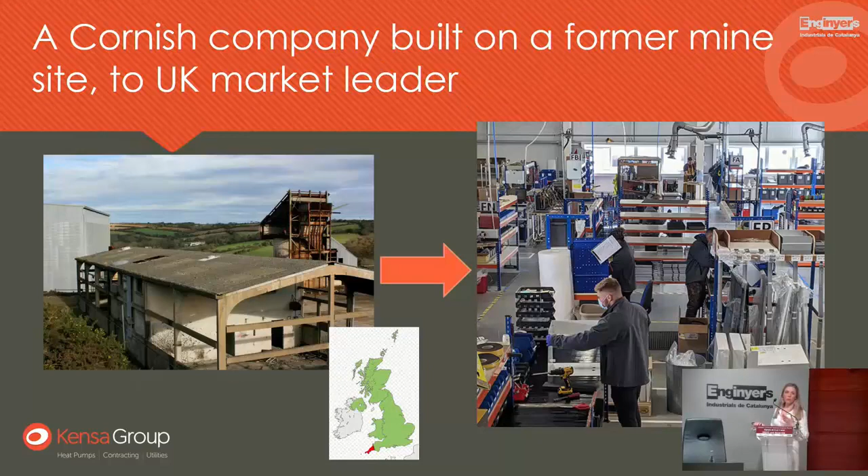I work for a Cornish company, right down in the southwest of the UK, which meant I had a really long journey to get here because I live about 3 miles from this factory. Our factory in Cornwall, where we build ground source heat pumps, is on top of an old mine. There are a lot of mines in Cornwall, and that means we're actually able to heat this new building on the site with water from the mines beneath it, which is a really cheap way of installing the infrastructure you need for ground source heat pumps.

The Kensa Group has 4 different companies. We've got our parent company, and Kensa Heat Pumps is our manufacturing company. Now, we found, as many other people do, that if you put a heat pump into a house, you get a phone call saying my heat pump doesn't work. But quite often the issue is that the system hasn't been designed properly, it hasn't been installed properly, it hasn't been commissioned properly. So Kensa Contracting was started so that we could do the design, the installation, and the commissioning, and that our customer had a single point of contact so that if anything goes wrong, they just speak to one person to get it fixed.

The upfront cost of ground source heating is incredibly high. We want to reduce the barriers to uptake for this technology, and so Kensa Utilities was formed, and that's the part of the company I work for. It's been created to fund, own, and maintain the ground array infrastructure that serves our heat pumps, and in that way we grow the market so we can sell more heat pumps.

Kensa started over 20 years ago. Initially, our market was the self-build market, probably very similar to the kind of installations you have here regularly in Catalonia, where it's individual properties — people with quite a bit of money who care about the environment and want the best heating available, so they install their own system. That's a very small market, and it doesn't help us solve the issues we have of high carbon consumption.

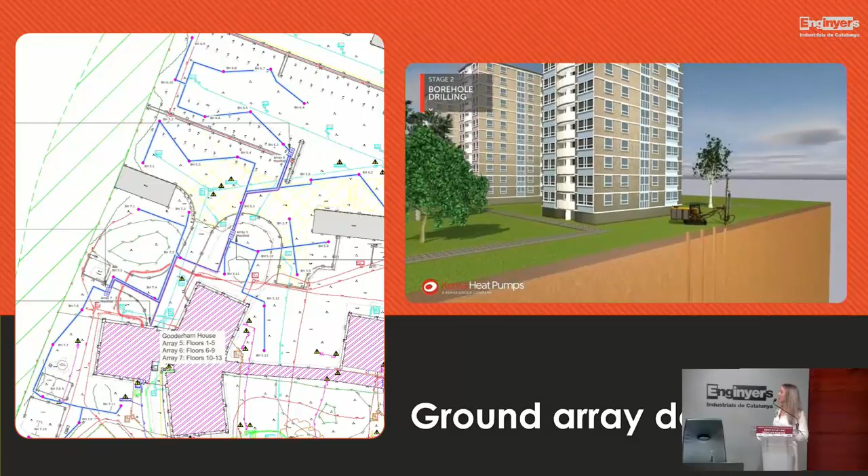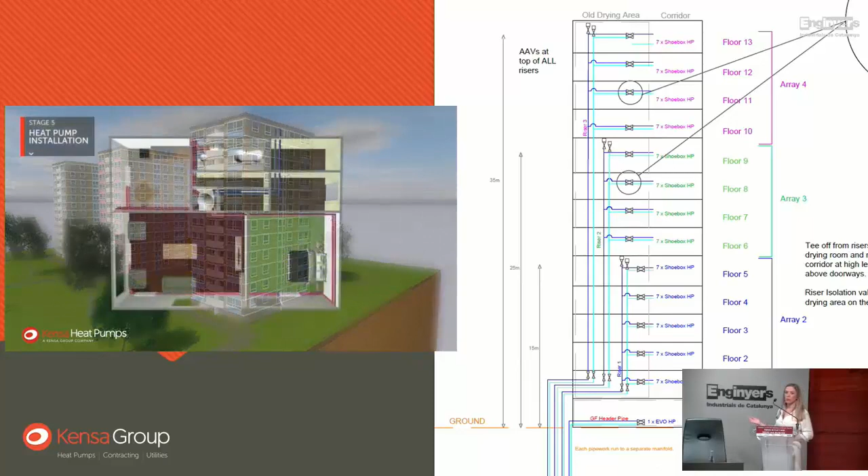Now, inside the building, you can see the feeder pipes are separated into 3 different arrays. That means we don't have to have a central pumping system on these pipes, which reduces the maintenance cost and ownership cost to the person managing this system. You don't have to have an electricity supply to pump fluids around those arrays, and it makes the business model far more simple.

So the blocks of flats are separated into arrays, and you can see here there are 7 shoebox heat pumps, our smallest heat pump, on each floor. That means there are 7 flats on each floor of these 3 blocks, and each array is serving between 4 and 5 floors of the building.

Most blocks of flats like this already have service risers, so we don't have to run pipes up the outside of the building. We use the existing service risers and install insulated pipes up the centre of the building. Now, you've heard a lot about not insulating the pipes, and that's great when they're in the ground where they can gather heat. But once you come up out of the ground, if you don't insulate them, you end up with condensation on the pipes within the building, and you don't want that.

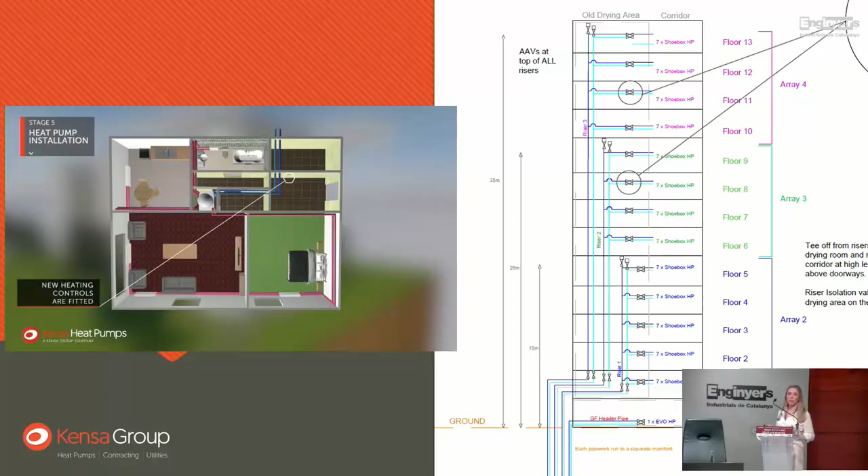So the pipes up the service risers are all insulated. You can also see on the design there are 5-way valves on each of these for every single flat, because when we fill these pipes with water, we have to pressurize the whole system and pressure test it to make sure there aren't any leaks before we switch it on. It also means we can isolate each individual section of that network, so if something goes wrong on one floor, it doesn't have to affect all of them. That's very important at this scale of project, because what you don't want is for the whole system to go down and have 300 people without heat instead of 2.

So inside the house, these are images from this block of flats here. That's our very small shoebox heat pump. It's a lot bigger than an actual shoebox, but it does genuinely fit under a kitchen sink, and that's really important when you're looking at high-density housing where space is a premium.

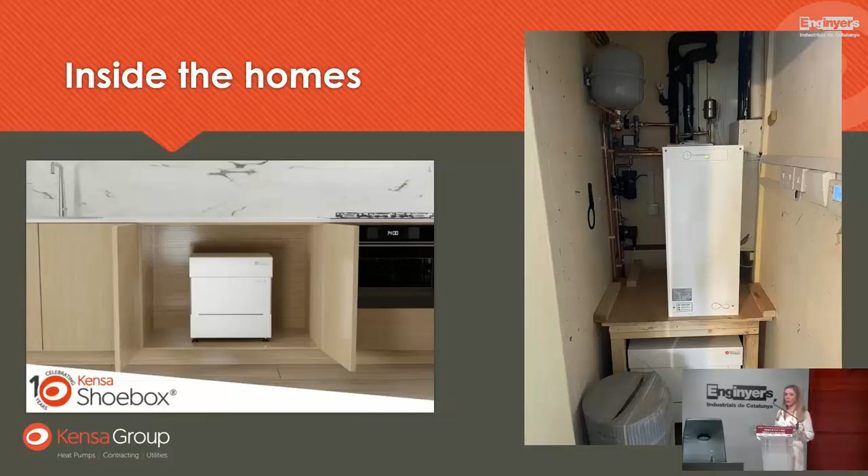On the right, the image is the shoebox heat pump underneath a phase change heat battery. This heat battery is in place of a hot water cylinder, but it's about 1/3 of the size. So instead of using water for energy storage for your bath and shower, it uses salt, which means it can hold a lot more heat in a much smaller space. Again, it's really vital for smaller properties where space is expensive.

So this is the project in numbers: 273 flats across 3 blocks. That's a huge number of people that had their living conditions improved. These flats previously had electric storage heaters, so the people living in these houses have had their energy bills cut by more than half. These are all lower income households, meaning we're taking them out of fuel poverty. They can actually afford to turn their heating on now, where many of them didn't before.

Also, with storage heaters, you have to remember to charge it at night to release heat in the day. It's not heat on demand. They can run out of heat, so we had people that were cold in the evening. Now we know every single person in these blocks of flats is going to be able to have heat when they want it. There are 109 boreholes serving these flats, a very large amount, nearly 29 kilometres of drilling. The whole project is being done in 9 months.

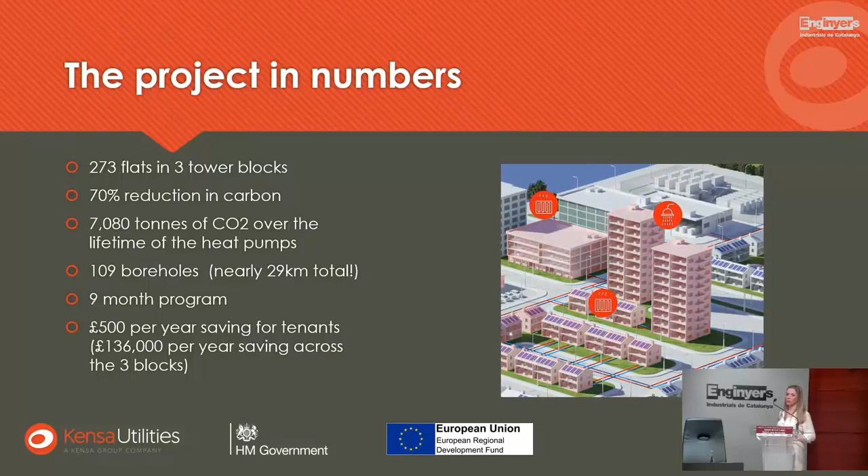Which is a fantastic feat of engineering. I think that's probably one of the most impressive parts of this project. And it'll save the residents £500 a year. That is different to the way you'd see it here, our energy costs are higher than in Catalonia, but it's still a reduction of over 50% to each household, which is £136,000 across the 3 tower blocks.

This is just to bring it back to the fact that these are real people that have had their lives improved. We've talked a lot about the engineering and why we might want to save the planet, but these are the actual people who are now able to heat their house when they couldn't before. They report that it's easy to use, it keeps their house warm, and it's much cheaper than the old system we had.

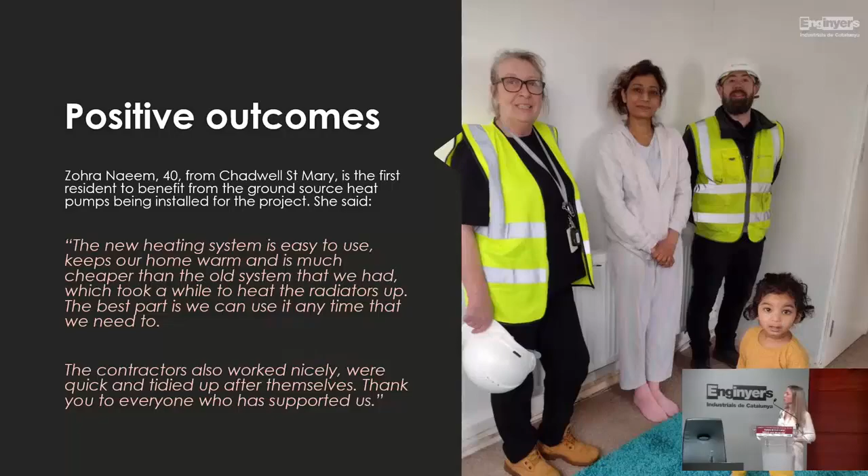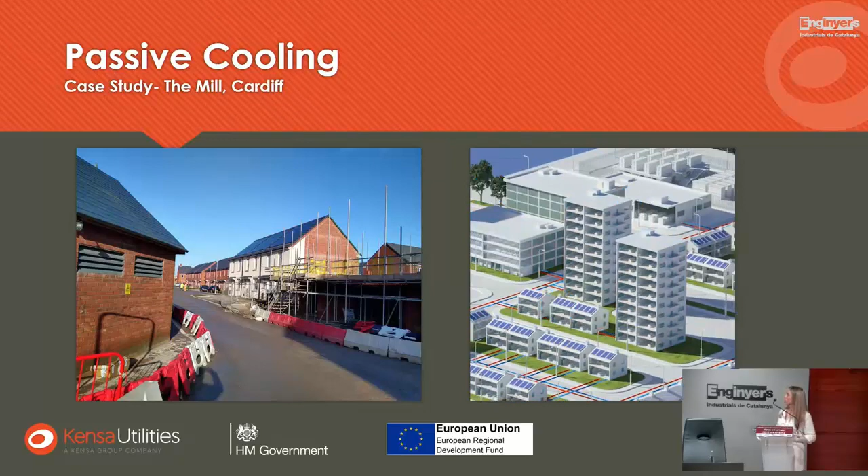We monitored this house between July and October last year, through 2 heat waves, which won't sound very hot to you, but for us in England it was incredibly hot - 32 degrees outside. Most homes in England don't have any cooling, so that is really quite warm. The room we installed the cooling in was maintained at 21 degrees Celsius, and that's without turning the heat pump on - just using the ground and dumping the heat in the borehole.

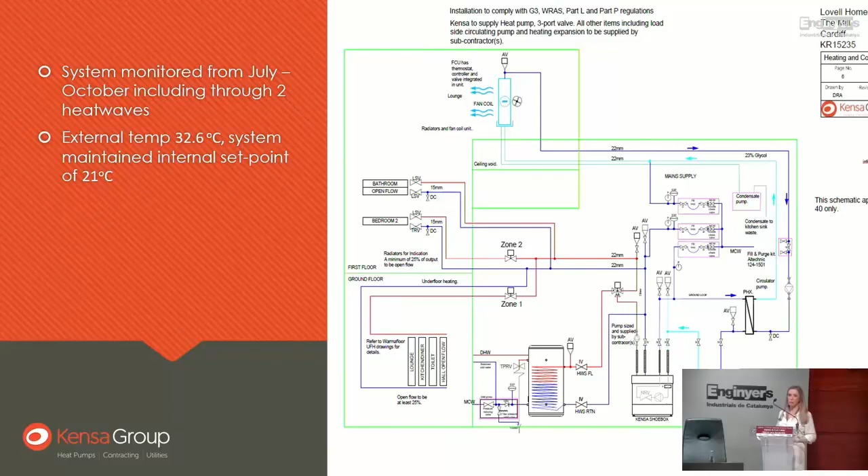This is the unit that you require - just a plate heat exchanger on the bottom, a circulation pump for the ground side, and a circulation pump for the domestic side. It's ridiculously simple. So the running costs for a single room were £1.14 a day.

To put that into perspective, if you were to cool the same room with air conditioning, it would be £4.25 - about a quarter of the price. And the reason for that is that all you're doing is running 3 motors - the 2 circulation pumps and the fan coil unit. That's the only energy it requires.

If you were to cool the whole house over this period, it would have been £378 with this model, and £1,409 if you used air conditioning.

The benefit of this as well is that you dump the heat into the ground, and so when you run heating in your home or create domestic hot water, you're getting that much cheaper, because your heat pump can run more efficiently - it's doing less work to upgrade that heat when it comes in, because you've warmed the ground.

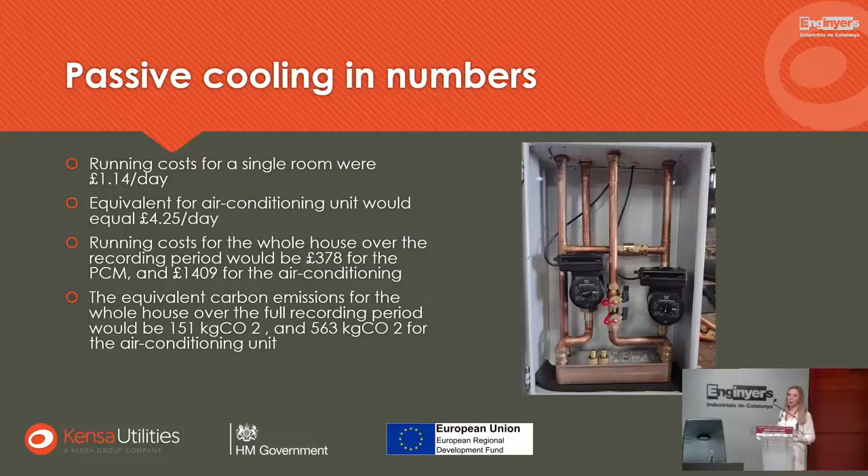The other benefit is it's about a quarter of the carbon as well. So your impact on the environment is far lower if you're using passive cooling compared to air conditioning.

A little bit more about the business models. You can see from the passive cooling how that would be appealing to homeowners. It really helps us to sell this technology, that it's lower cost, so it's more desirable. And this is really what we're trying to do - to expand into that market.

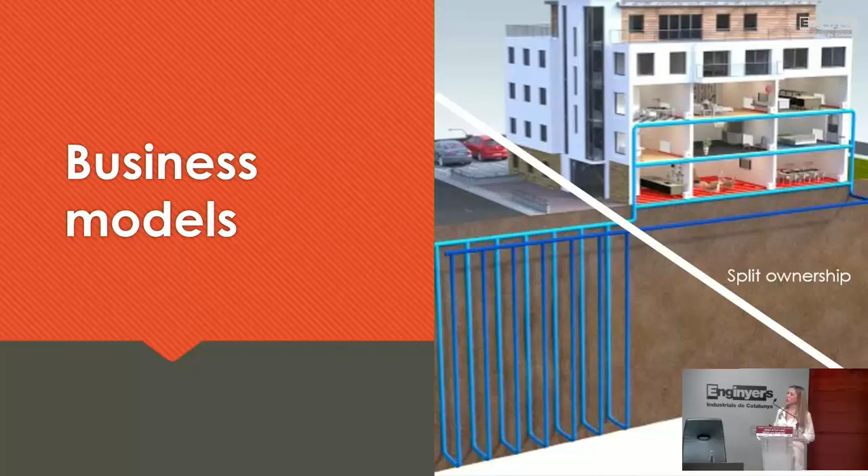The next biggest thing we can do is stop selling our customers this infrastructure in the ground. Up until now, Kensa Contracting has been selling the whole system to landlords and developers and just handing it all over. If we remove that bit, if we absorb the upfront cost and then charge households for connection, it makes it easier for these projects to go ahead.

Our vision, and we haven't called it Thermonet, we call it networked heat pumps, which I'm not convinced is the best name for it, because people tend to want to be their own little castle. They don't want to be connected to other people and at risk of failing along with them. They want to be independent. So calling it networked heat pumps makes them feel part of something they probably don't want to be a part of.

So we do particularly want an individual heat pump in each home, and that's why we have such small heat pumps available on the market. It's mimicking the gas network. That's very important for us in the UK, because currently 85% of homes are heated with natural gas through the gas network. So people are very familiar with that model. They don't want to change, and we don't want to make it seem difficult to them. So if we replace one network with another, it's quite familiar.

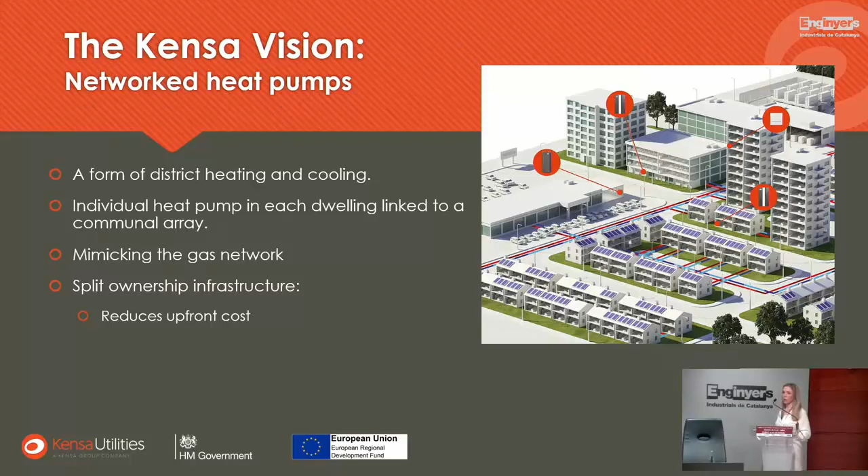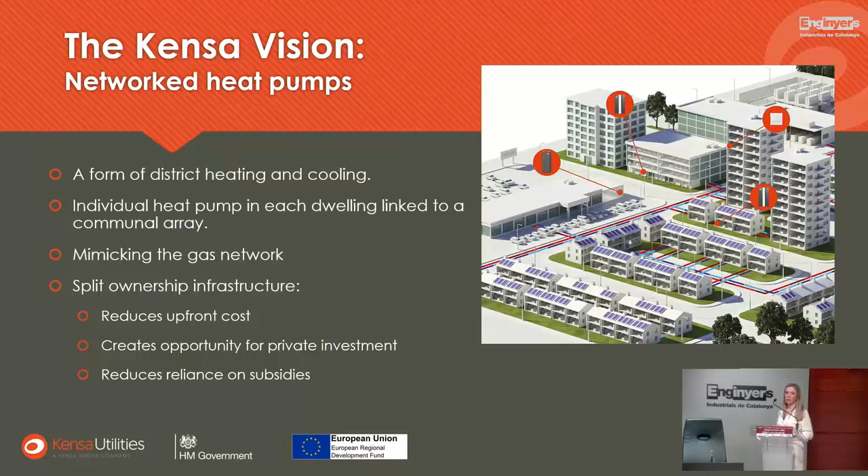Kensa Utilities is selling split ownership infrastructure. Kensa Utilities will own the infrastructure up to the point it connects with the building, and that reduces the upfront cost by 30 to 40%, depending on what market we're working in. It creates an opportunity for private investment. So instead of relying on government subsidies, which change annually, we can actually create a longer-term business model and more stability in our business by using pension funds and other investors.

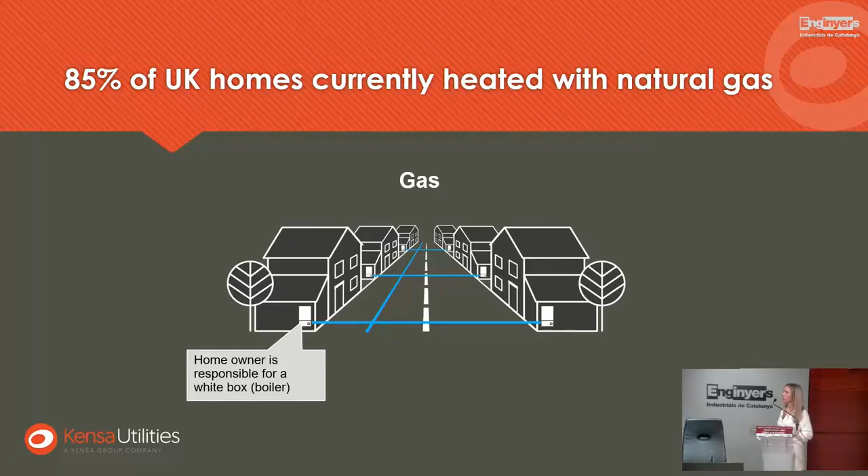85% of UK homes are used to this kind of setup. They own the boiler in their house, they connect it to the gas network, they don't care how it works, they just have a lot of heat. They don't care if it's particularly efficient, because it's always been really cheap. We want to do the same thing, but with a low-carbon alternative. At the moment it is expensive, but we expect that to come down as the momentum increases, as the market grows, and having more drillers, more installers, this cost is going to come down.

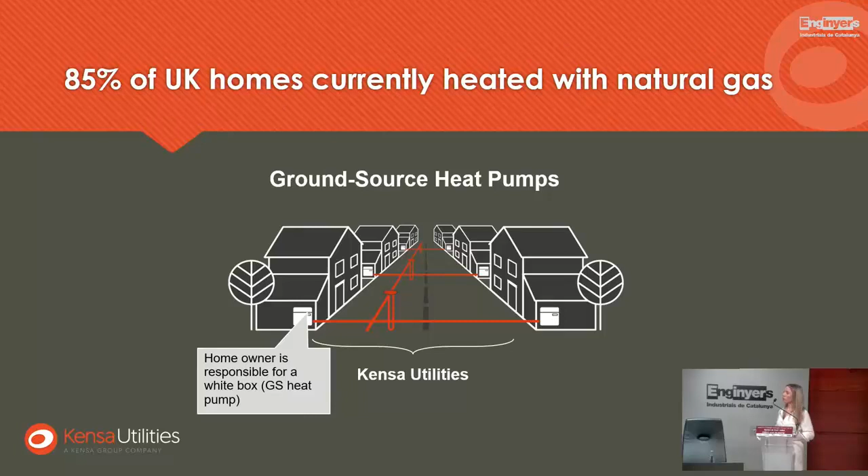The other thing we're doing is, unlike a high temperature heat network, there is no heat metering. So we don't have to have that additional piece of equipment in the house to measure how much heat they're using, and that reduces our cost for administering the whole system. It also reduces the complexity. This is a very simple business model. The cost we charge is a flat rate standing charge, so the household knows what their bills are going to be, and we don't change that. The purpose of that standing charge is just to repay the capital investment. So it's simple - everything we're doing is to try and keep this simple.

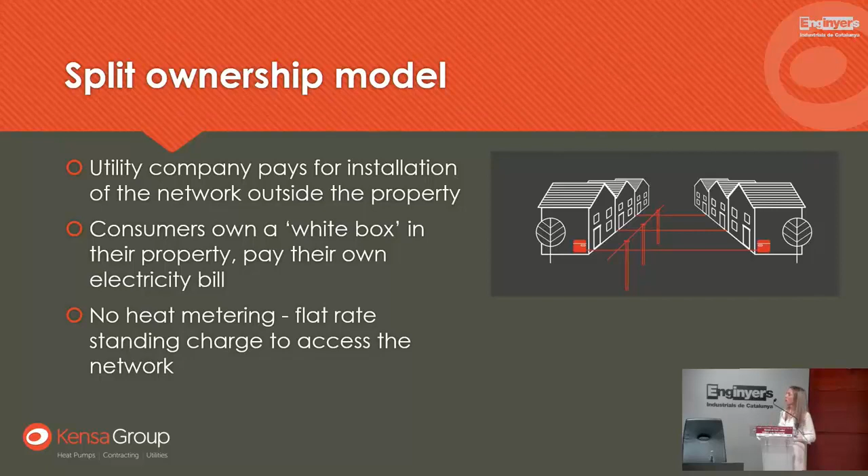Right now, we're not even particularly looking at introducing more waste heat into this system. It's complicated and difficult enough to get simple systems like this off the ground. We're just doing boreholes, we're just doing a flat rate standing charge, and we're bringing in the private investment to do that.

This now is the project that I spend most of my working week on. It's called Heat the Streets, and it's been part funded by the European Regional Development Fund. In this project, we're installing 100 heat pumps across 5 different sites in Cornwall. All of those are with split ownership. Every single customer is paying us a monthly standing charge to use our infrastructure, and we have installed a heat pump in their house that they own. They can change their electricity provider, they can manage their own heating costs. We're also installing the infrastructure for future connections.

This is what it looks like across the markets we're working with on Heat the Streets. Bear in mind these costs are heavily subsidised by the funding we've got. In new build, the developer gets ground source heating for the price of air source, because the equipment in the house is very similar - we haven't got an external unit, and they're not paying for the infrastructure. So we get cost parity with air source, which is a big deal in the UK. For social housing retrofit, that's our public housing - again, it's ground source for the price of air source, and the standing charge is really low.

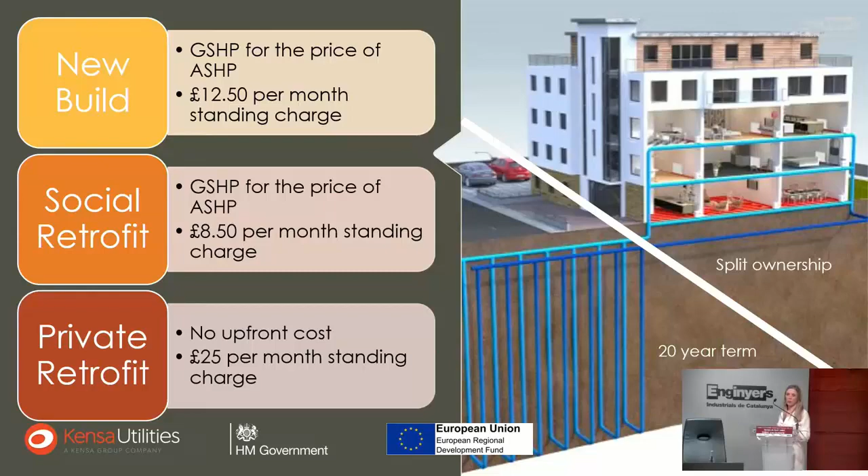And why would they do it? For new build developments, it reduces their upfront cost without increasing the cost of running the system to the household. So you get a more attractive heating system - you don't have an ugly box in the garden. We haven't messed around with the pricing, so it's not harder for them to sell the houses later.

In social housing, the social housing landlord isn't responsible for infrastructure, which makes their job much easier - they don't really want to be responsible for maintaining infrastructure serving their properties. For private housing, the upfront cost barrier is removed, and they don't have to navigate the low carbon heating market. They don't have to work out: is hydrogen coming? Is an air source heat pump better? Who do I go to? Who's going to install it? We found those are in fact the biggest barriers in the households that we looked into in this project.

On the right here are the three different models of heat pump that Kensa builds. We've got the shoebox, which does flats and small houses; the Evo, which will do really quite large buildings; and then that really big one there is for non-domestic buildings. You can cascade these heat pumps as well, the bigger ones - so if you have a higher heat or cooling demand than these can provide, you can have several of them in series.

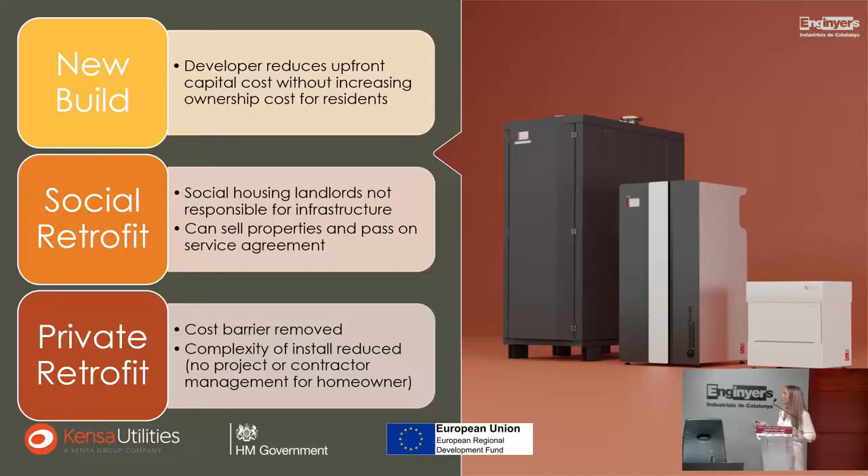This is the really fascinating bit about this project. You've seen in the presentations earlier today people talk about borehole fields - well, we've worked in an area here where there isn't space to do that. Instead of using a borehole field, we're installing the boreholes in the road. Now, there aren't many places that don't have a road, so there aren't many places that you can't decarbonise.

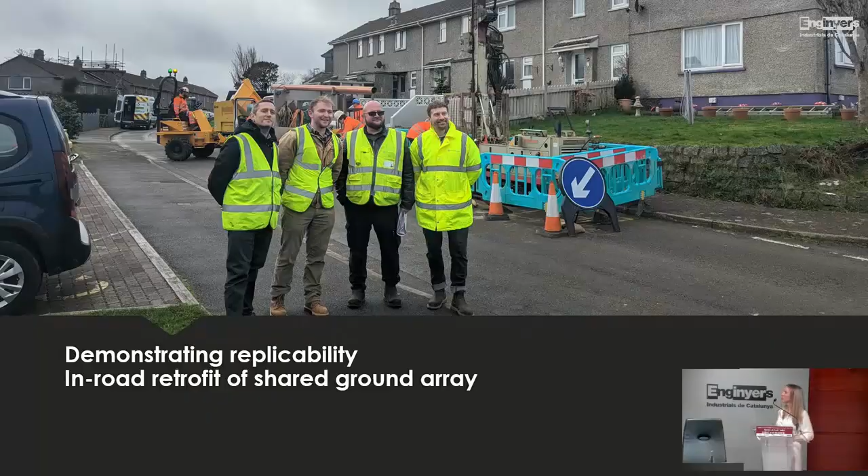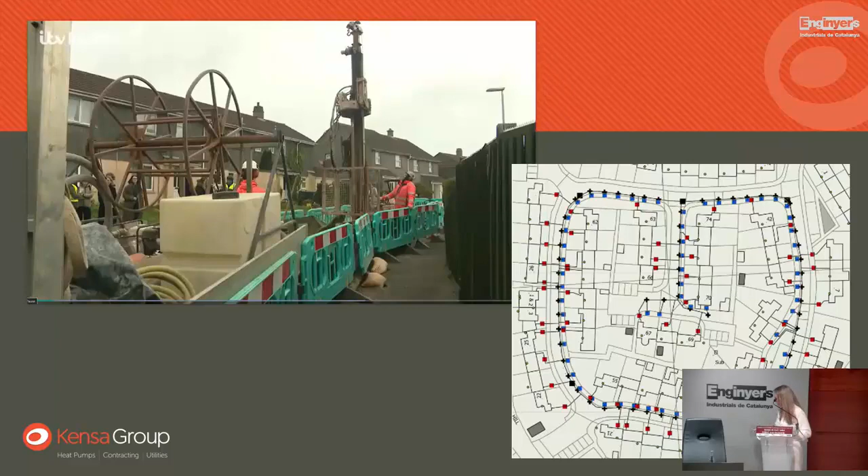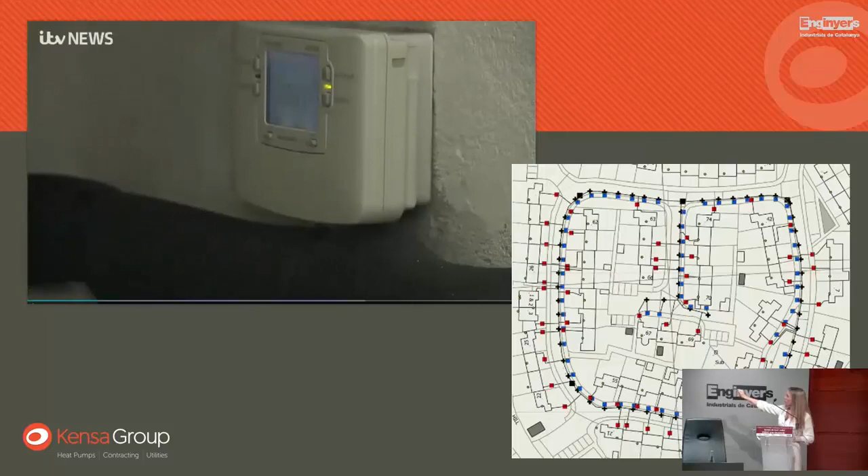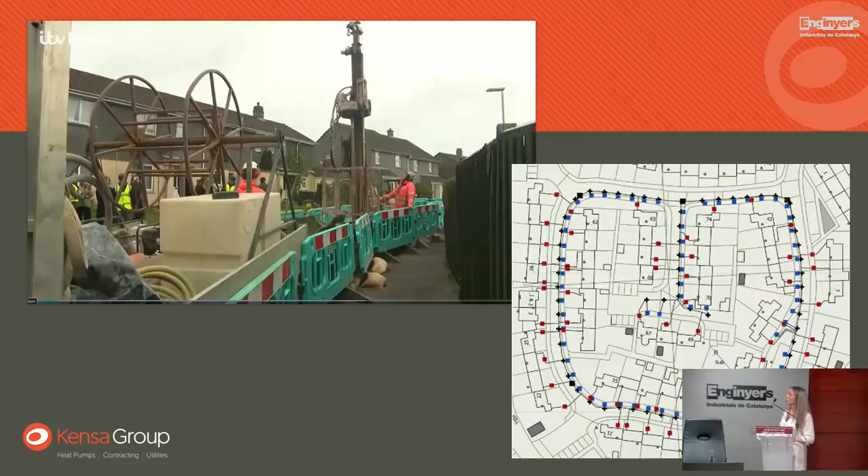The video on the left is just a few clips of the works - we're trenching all around the estate. As you can see, this is the housing estate here. Each of those red dots is a connection for a house, and each of the black crosses is a borehole. We've had to work around the existing utilities in the highway, and we had to get planning permission to do this. The local authority was really worried we would freeze the road. We're really not going to freeze the road.

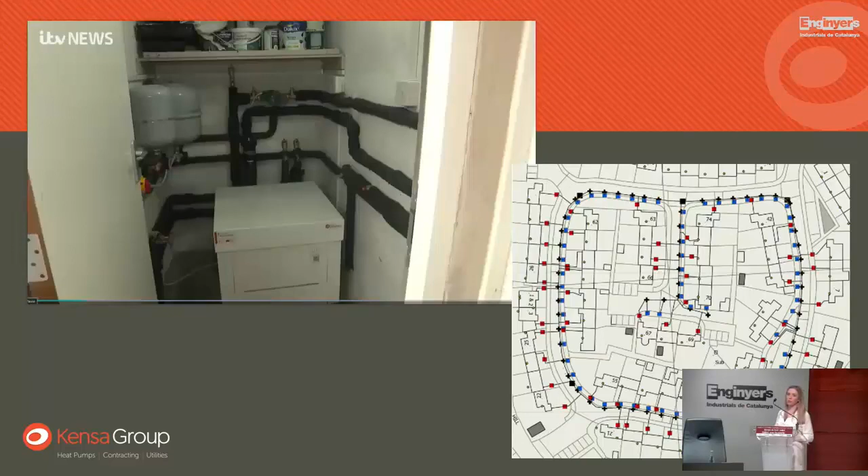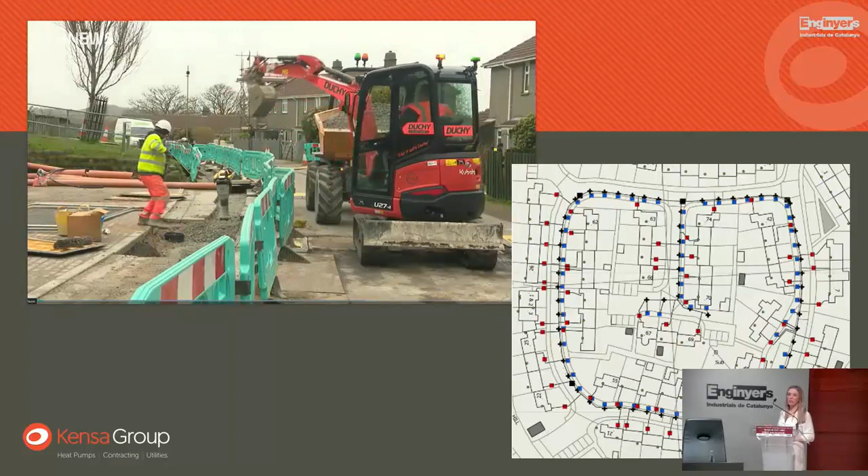During delivery of this project, we will install 20 ground source heat pumps in this estate, and there'll be 40 connections in place for the rest of the houses to join up to later on when their heating system breaks. That is really what we think is going to be the future of Thermonet in the UK - exactly like our current utilities, you install it in the road, put a connection in place, and when your heating system breaks, you put in a new one and connect it to that network.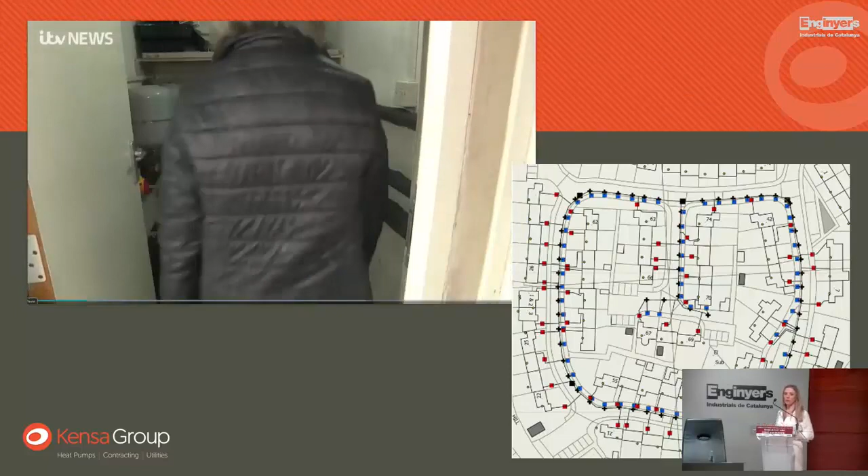The biggest part of the work we've had to do on Heat the Streets is actually creating the operational parts of the business required to deliver this. We have to have a set of legal agreements in place so we can protect our income on this asset through the future. We had to set up customer accounts and billing systems, and none of this was part of the Kensa business model before - it really has been a huge amount of work.

Gaining permission to work in the road has been difficult. We had to install temperature sensors in the road at various depths so we can report back to the council that we are not freezing the road. I actually think that's going to be quite an interesting study that people will be keen to see, because we talk about the flow temperature in the infrastructure and the temperature of the brine, but we don't often look at the temperature effect at various distances from the infrastructure. So we're going to have quite a lot of data come out of this project.

We are not regulated in this industry in the UK, but we're joining a voluntary regulating body called the Heat Trust, and that is just a way to promise to people what they can expect from this, which is important when people are unfamiliar with the technology. They shouldn't need to understand it inside out.

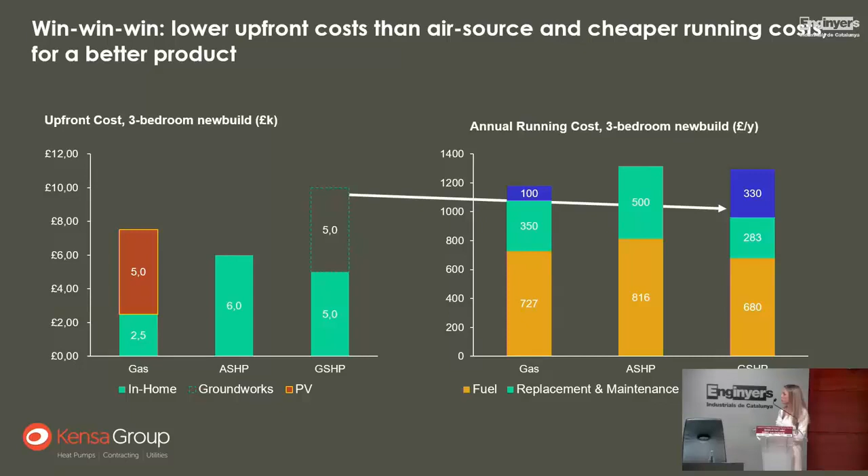All of the customers reported there was less disruption. So this is in retrofit, and I'm sure it's the same here. You keep getting told it's too disruptive, people won't take it, they won't like it, it costs too much money. People will put up with the disruption as long as they know what to expect and how long to expect it for. And we're digging up the road and drilling holes in front of their houses. It is a disruptive process. We had to remove all of the radiators from their houses and replace them with larger ones.

Half of them have already reported energy bill savings, and all of them said that it was a better heating system than they previously had. And this is another crucial issue: every one of these had to sign a 20-year service agreement with us. We were told that people wouldn't do that because it would make it too hard to sell their house. We've already had 30 homeowners sign that 20-year service agreement.

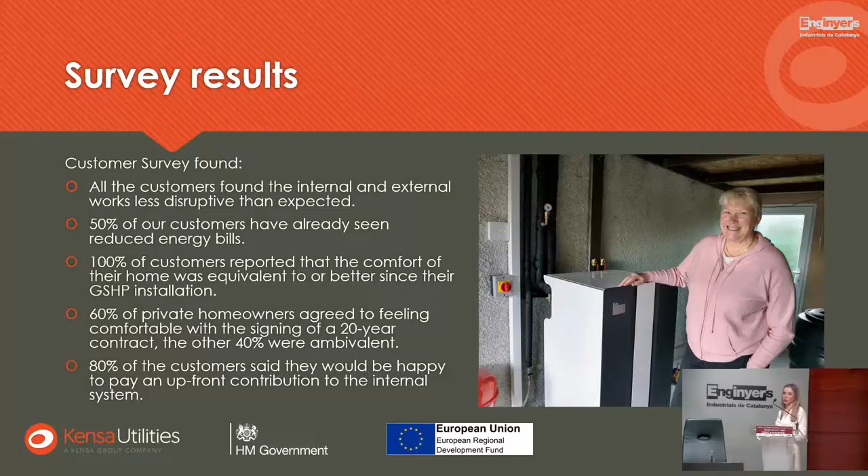60% were comfortable with it and 40% were ambivalent. Nobody was saying that that was a big barrier to signing up. 80% have said that they'd be happy to pay an upfront contribution to the internal works, and that's what I'm relying on for my next project.

This is a short video interview with one of the people that's receiving a heat pump in Collins Park, where we're working in the road. When we had the opportunity of Heat the Streets in our village, we knew that actually that was the system that we would dream about owning, but we didn't have the spare cash to be able to buy it. That was our dream system, and when this came along, it was an easy yes to get involved with it, because ultimately that's what we would have loved to have been able to afford all by ourselves.

So we're delighted. I'm looking forward to getting rid of my oil tank, which I look out of my window at from my lounge. I'm looking forward to getting rid of that, and knowing that the ground source heat pump is going to be installed and it's going to really complement the solar that we have. It's just going to be a really big leap to reducing our carbon footprint, and I think that's really important for our future.

And I'd just like to end by saying it seems like a really difficult problem, and it is. But if you have an organisation that will run these projects, that will get the funding, that will organise the households to all work together, it is possible, and you can do it, even in high density housing areas. There's always a way, and I think we've really shown that by just drilling into the road.